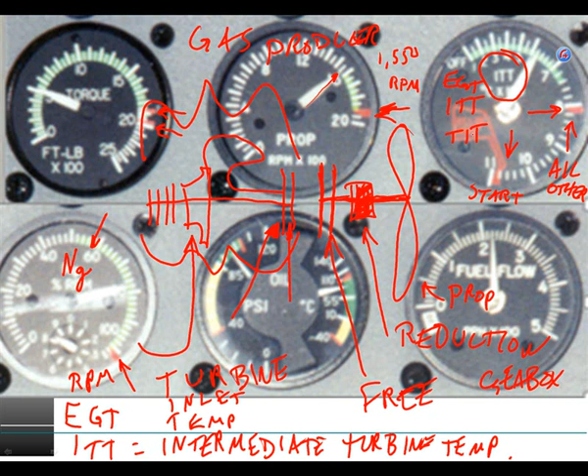So here's oil pressure in PSI. You'll notice there's a red line, a green arc, and a yellow arc. And here's degrees Celsius for the oil. There's a nice green arc here, with an upper red line and a lower red line. That lower one is actually minus 40.

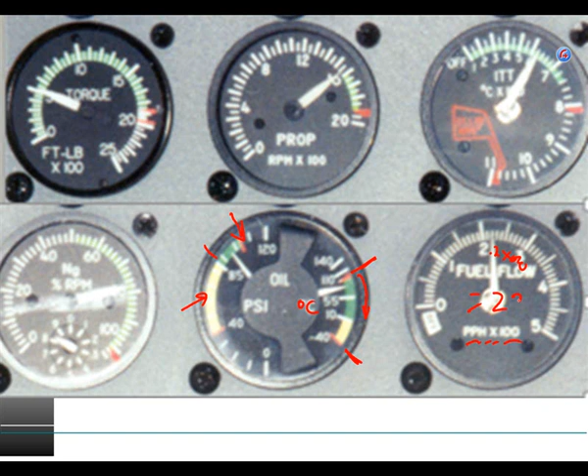And then fuel flow. You notice it says pounds per hour times 100. So this is reading a little over 200 pounds per hour. In fact, let's see, 2, 3, 4, 5 - yeah, so that's 2.2 times 100. That means it's burning 220 pounds per hour at the moment this picture was taken. At least that's what the gauge said.

So the good news is when you operate jet engines, you get gauges.

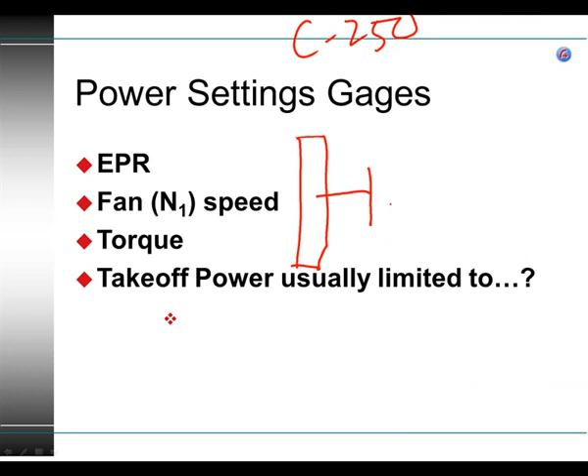Silly students. Literally, well, I'm gonna show you, I got to show you a picture, so that's the only way I can do it. So here's the gearbox on a C250, and there's a shaft in here, and there's a turbine on it. And then there's another turbine or two, and that drives the compressor. So this right here, that's the gas producer. You could also argue we could call that N1, and then here you could call that N2, and sometimes that's called the power turbine.

The trick is you've got to somehow get the starter motor to spin that shaft, because you've got to get the starter motor to spin at least a compressor somewhere. So this is not how it looks on the inside. On the inside, it's really... I've got this turbine right here. I've got a turbine right here, and then I have this shaft, and now I have the turbines and the compressor. So remember, this is effectively like a cardboard tube, except it's made out of metal. And here's the gearbox.

Both of these shafts go into the gearbox. So I can have a starter motor on here, starter generator, and that power... whoops, I don't want it to go to that one. The starter, the power can go to the shaft and spins the gas producer and spins NG. So this part here is NG, lowercase g. But this power turbine, that's what we want to leave the engine, so you can put a gear tooth around it and other gear teeth, and it leaves the gearbox.

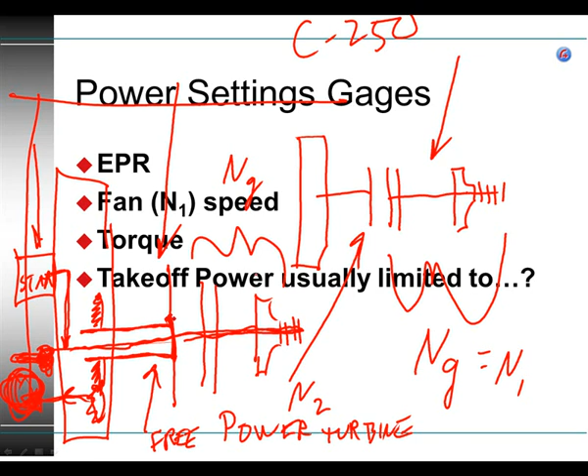When was the first Dawn of the Dead movie came out? Was it like in the late 70s? Is anybody a slasher zombie fan? That's the one where a Bell 206 main rotor blade chops somebody's head off and makes him look like Frankenstein. In reality, somebody's skull wouldn't chop off that easily and be jagged and stuff. But if you want to know about body destruction when it hits aircraft parts that are rotating fast, see me after class.

So we're back to our Bell 206. And so now we know that we have a free power turbine in addition to the gas producer. So just for fun, I'm going to go straight to the gas producer. It's hard to see those letters right there, but this is NG RPM. So as aircraft mechanics, this is going to be one of these RPMs that we're going to look at. And if that's what the starter is spinning during start, this is the main RPM gauge you're going to be looking at during start. Same thing on a PT6. When you're starting a PT6 that has a free turbine, you're not looking at the propeller RPM, you're looking at the NG.

Just like in that PT6, that power turbine, the free power turbine is hooked up to the propeller. They call it propeller RPM.

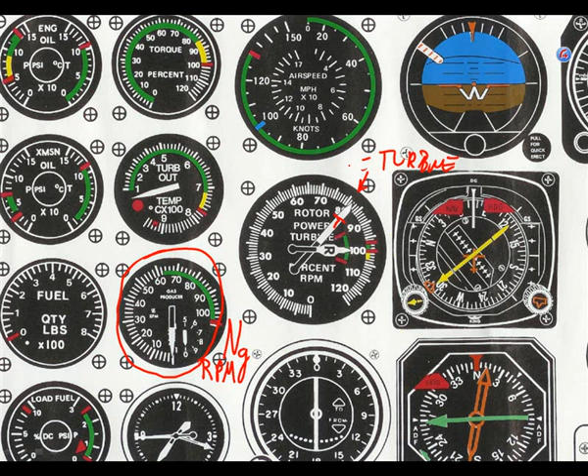In a helicopter, they've got a T on here, and T is for turbine. But that's really the power turbine, the free turbine. That's the one pilots look at a lot, because that's what's driving the rotor blades. And if you fly helicopters, when the rotor blades don't spin fast enough, you die. So helicopter pilots are really...

What's the G? The G stands for gas producer. That's the part of the engine that has the compressor and the combustion chamber, and it has the turbines that drive the compressor. If you took the power turbine out, it'd still be a jet engine and it would still run. But we need to extract energy in this case to drive the rotors, the transmission and the rotors. So we put that extra turbine in there, and it drives the transmission and the main rotors.

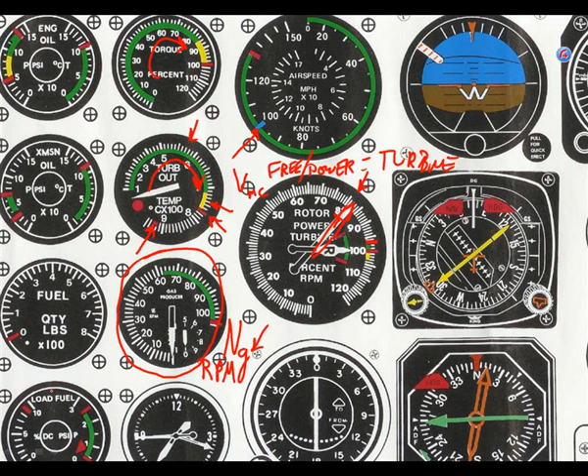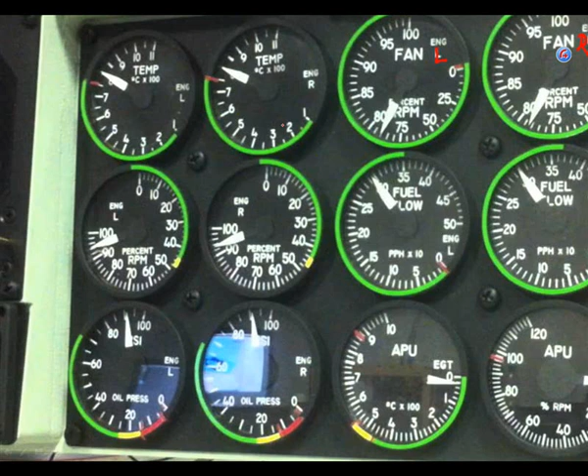So here's another set of gauges. This is a two-engine job. I personally don't like the way they put it. Here's fan left, and here's fan right. And here's engine left for temperature, so this is EGT, and here's engine right for EGT. I like them running up and down, that's the way they usually do it. So here's a fan, based on what this indication says, it's doing 75, 76, 77, 78. So there's 78, and this says percent RPM.

Can you use the fan RPM to set engine power? Yeah, you're all going to get this wrong on the test. What are the three typical gauges you use on turbine engines to know how much power the engine is producing? EPR is one.

N1 is the same as the fan. And then torque - if you're using a turbo shaft or a turbo prop, it's going to be torque. So this is also the same as N1. So here's a red line EGT. Look, we've got fuel.

Yeah, we covered it yesterday or the day before. It's on a slide in black ink on the screen. Well, not black ink - whatever photons were coming out of the screen. Yes, you need to know on the test that fans are always N1.

So here's fuel flow, pounds per hour times 10. So right now it says there's 25, there's 30, that looks like about 29. So 29 times 10, we add one more zero - pounds per hour. So this is going to be a smaller turbine engine.

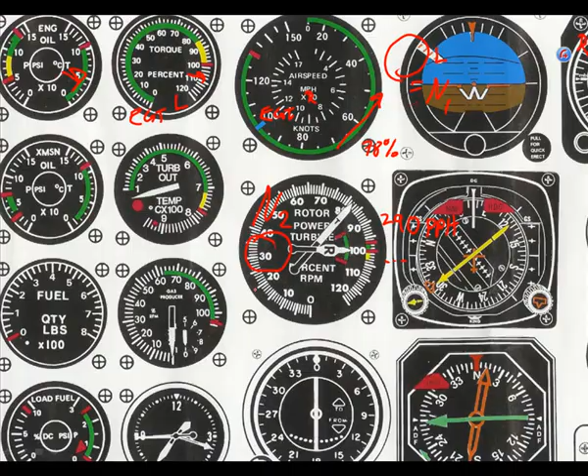So there's another good question. If you are... did I delete it? Oh darn, I deleted it. If you're starting up a turboprop or a turbo shaft, what's the starter motor hooked up to - the gas producer or the power turbine?

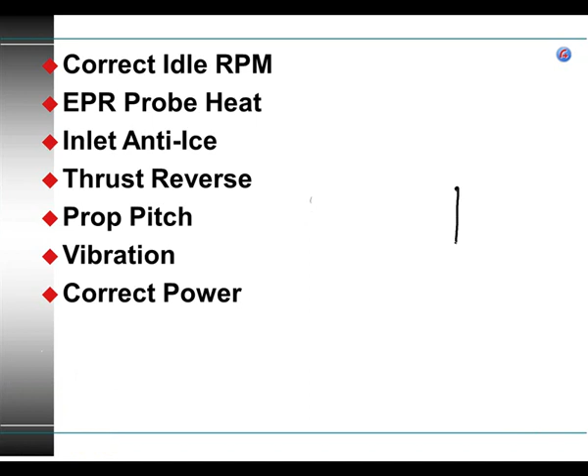Let's say you got a PT6. You got a power turbine and it drives a gearbox and it drives a propeller, and then you got a couple of turbines and that drives the compressor. Which of these is the free power turbine, the one on the right or the one on the left? This is a propeller right here. Okay, so this is the power turbine.

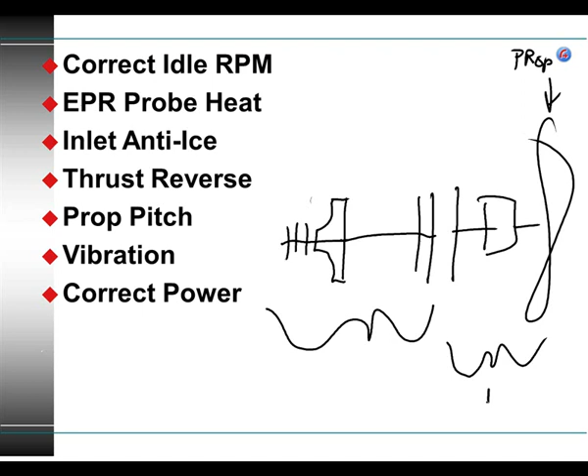It's also called what kind of a turbine could you call it? In this case, it's a free turbine because there's nothing mechanically connecting this shaft to that shaft. So, where's the compressor on this engine? It's on the gas producer. So this is going to be NG - G is for gas producer. And here's the compressor.

So during start, do we need some outside air to blow through the engine? During start, do we need a lot of outside air to blow through the engine? So which one of these two shafts do we want the starter motor to spin? NG, which is also known as the gas producer.

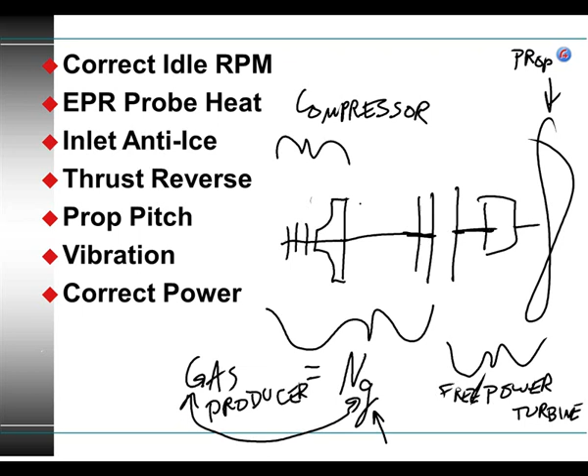That's where this G came from, because really all this engine in here is doing is making gas that will blow through the power turbine. That's all this part does. It's just there to generate high velocity, high volume gas. It just happens to be hot, but that's the only way we know how to do it.

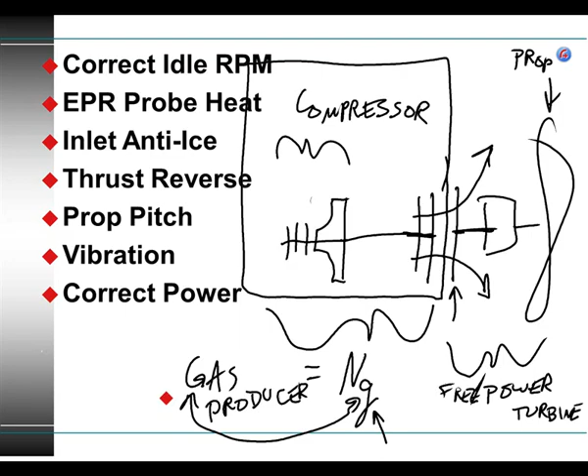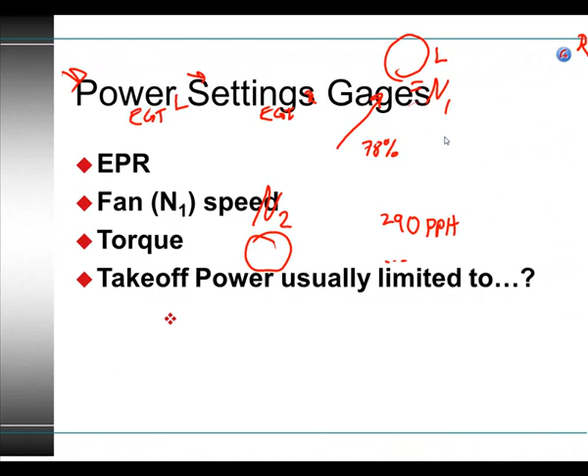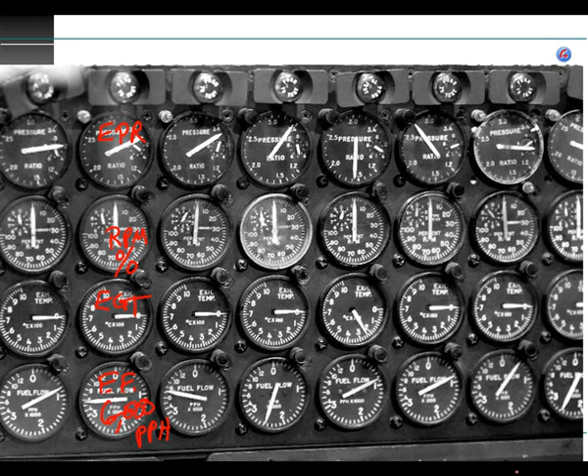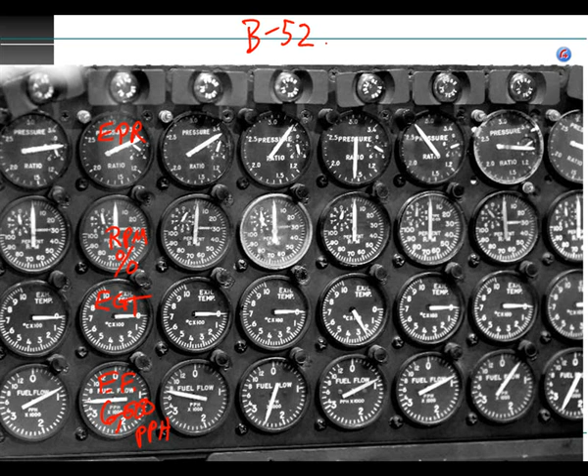How many engines are on this aircraft? Name an aircraft with 8 turbine engines. Yeah, I can't think of another one that has 8 turbine engines. The Spruce Goose had 8 R-4360s, 4,360 cubic inches, approximately 3,500 horsepower each on takeoff. They weighed around 3,500 pounds each. They were very large radial engines, which when you look at the airplane, look kind of small. So just for fun, I put this picture in here.

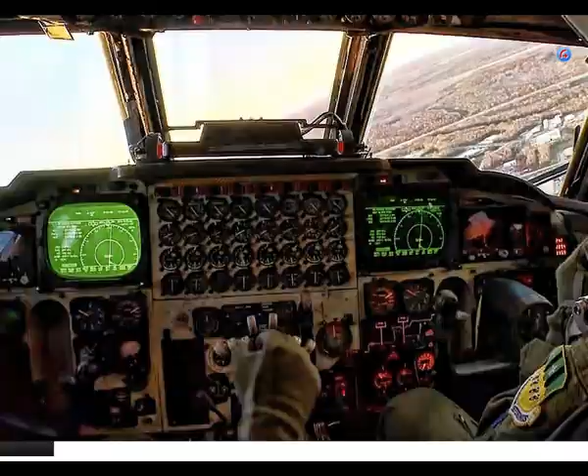Maybe we didn't get to this slide. Didn't we talk about N1 versus fan before? Oh, all right. So we've looked at EPR.

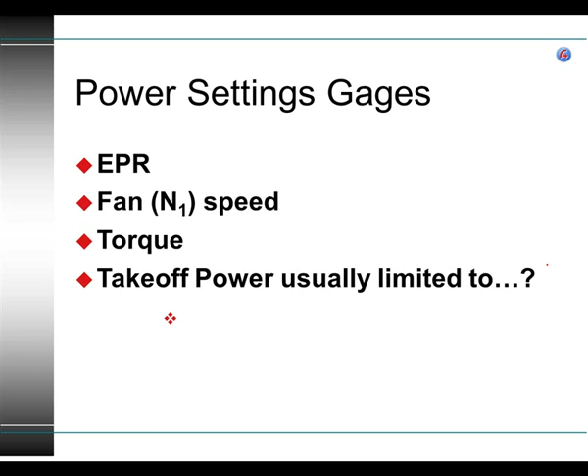Talked about takeoff power is typically limited to, maybe I just accidentally stuck this in there. Takeoff power is typically limited to how many seconds? No, I'm just kidding. Okay, how many minutes? 5, okay. Okay, I'll try to remember that.

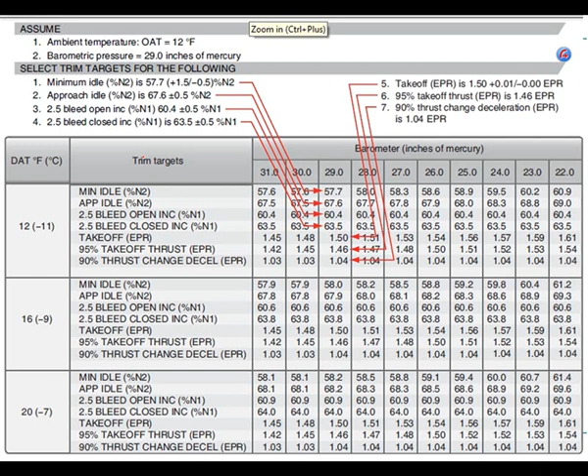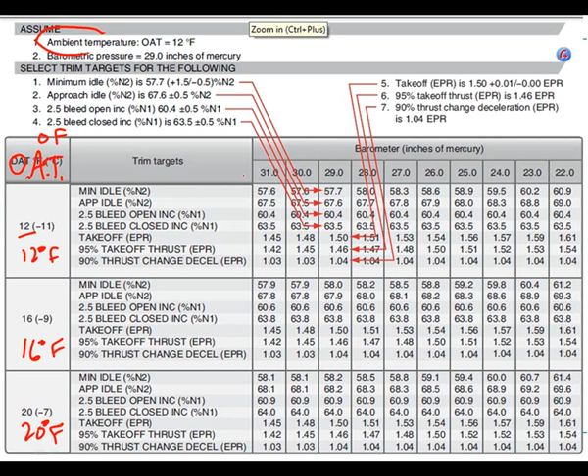So here's a page. I know it's really hard in the back to read the numbers there. But what I want you to get off of this chart, this is a Boeing chart, and this is what a mechanic would use out of a maintenance manual if they were going to do an engine run. And so ambient temperature, this is really OAT, so I'm going to make it really big. OAT, outside air temperature. In this case, it's degrees Fahrenheit. So that's 12 degrees Fahrenheit. Here's 16 degrees Fahrenheit. Here's 20 degrees Fahrenheit. And then these columns right here are barometric pressure.

And you may not have recalled on earlier days this week that when you go out and run an engine, it might run a little bit differently if the temperature is different and if the air pressure is different. So in order for you to know what fan speed...

So it's got to be for that particular engine and airframe. So I'm not going to go into this too much, but essentially it's talking about an idle RPM. So look at this. That says 63.5, and here it's talking about an EPR of 1.50. And it's hard to see it up here, but it says, where did it say? Plus or minus 0.5. So that's not a very big change, and that's not very much RPM difference, is it?

Here, let's look at this one. I don't like that one. Regular minimum idle N2 is 57.7, and it's hard to see that back there, but it says minus 1.5 to minus point... Maybe I just crossed it out. It ought to be plus to minus. There it is. Okay, I just can't see, and you can see even less back there. So it says 57.7 plus 1.5 minus 0.5. So what that is essentially saying is idle ought to be 57.7, but it can be 1.5 RPMs higher. It can be a half of an RPM lower.

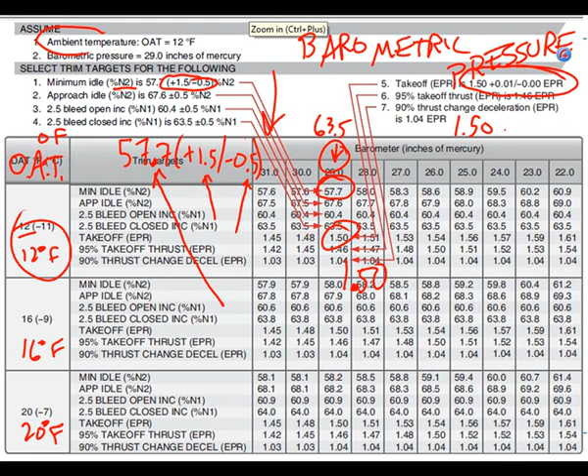Let's see, takeoff EPR, it says so right here. It's hard to read it out there. It says takeoff EPR is this number here, 150. 150 plus 0.01, that's not much, minus 0.0. So the EPR, it can be a hair too high, but it can't be any low at all.

Now, I'll bet you $100 this is on a computer-controlled engine. This has a full authority digital electronic control. You could say it's an...

Listening at the outside barometric air pressure and the current air temperature. But what if your airplane engine is on the ramp?

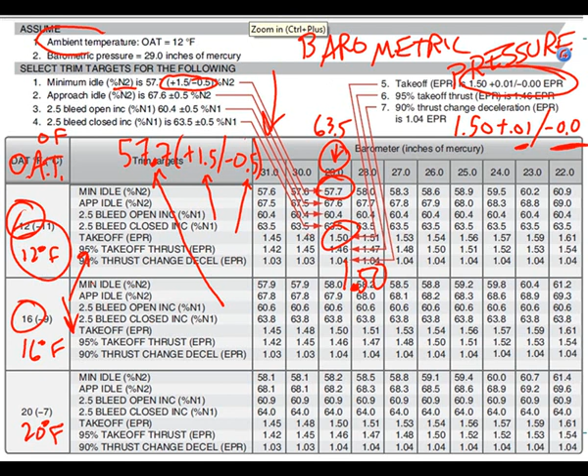All right, we're getting close. We're going to finish this tomorrow. But it'll probably take us 5 minutes on this slide, and then the rest will be a really, really, really fast review.